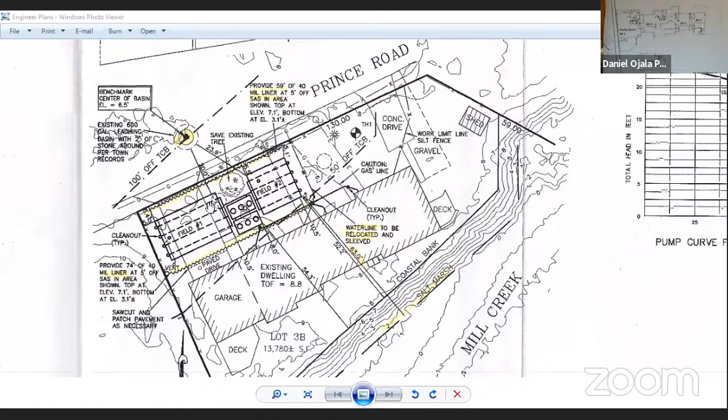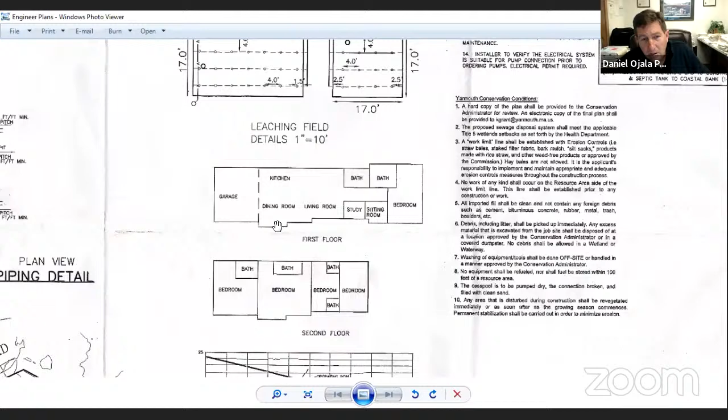The second print, I don't know if you can see that very well, but there is a pretty decent first and second floor plan that's now available. So I had emailed that directly to Bruce the other day, and we put it on the plan. The owner happens to be an architect and has got a pretty good hand, but that schematic there is pretty darn close. The bedroom over the garage is actually, you call it a studio. It's a 1-bedroom apartment or a studio apartment, but you refer to that as a bedroom.

And that's 100% legal if anyone's questioning it, because it actually withstood an appeal over 30 years ago. It was determined that it was there since the 50s or early 60s prior to zoning, and the neighbor appealed and lost. And there was actually a court case which affirmed the zoning board's decision that it was an apartment, it was legal, and it didn't need a special permit. And Peter Zorzi had actually gone through that almost 40 years ago. So it's clear that that is a legal apartment.

So we've got the dual compartment tank and the appurtenances. And about 33 years ago, he had a septic system design done by a team of Robin Wilcox and Ted Dumas. And they also determined that it was indeed 5 bedrooms. And now, in looking at Peter's plans, it's quite clear that it is 5 bedrooms.

There is a study and some sitting rooms, some little rooms, but there's another test in Title V that you can look at, which is you take the total number of rooms, and I could recite that verbatim if you'd like, but excluding bathrooms and hallways, living rooms, things like that. You count up all the rooms in the house and divide by 2 and round down. And so at 10 rooms, divided by 2 is 5, and you don't have to round down, but that also gives you the firm 5-bedroom existing.

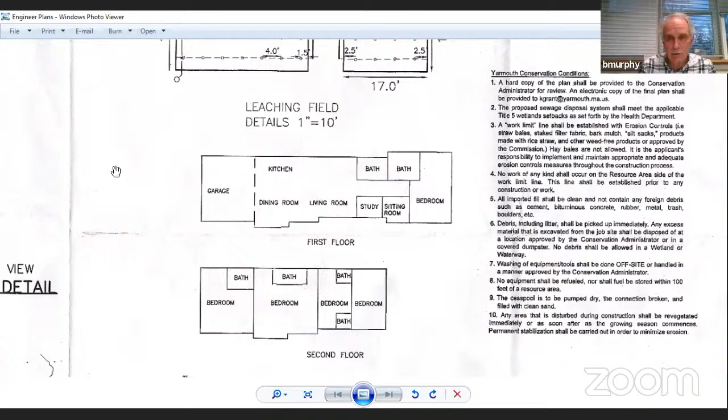I mean, we're getting 3 months. Fair enough. Yeah, that would probably be safer. I know you guys have a lot on the plate with the COVID and everything. Board members have any questions? Obviously, there's no room there. The only alternative is a tight tank, which we all know what it is and what that entails. That's, as I see it, the only other option. So not a lot here.

Yeah, tight tanks do better with a seasonal use. If you're there every day, they're very expensive. And then you get the honey wagon coming down the street, dripping. Oh, I agree, 100%. They're tough. So this is an all-season home? Yeah, it is. It's a year-round residence. Fully insulated, heated, everything.

So if you want to make a motion, we can move forward, if there's no other discussion. So perhaps we can move ahead with it then. I move that we recognize that this is maximum feasible compliance with Title V, the 4 variances as listed. Sorry, go ahead. And also the 2 variances under the town septic regulation.

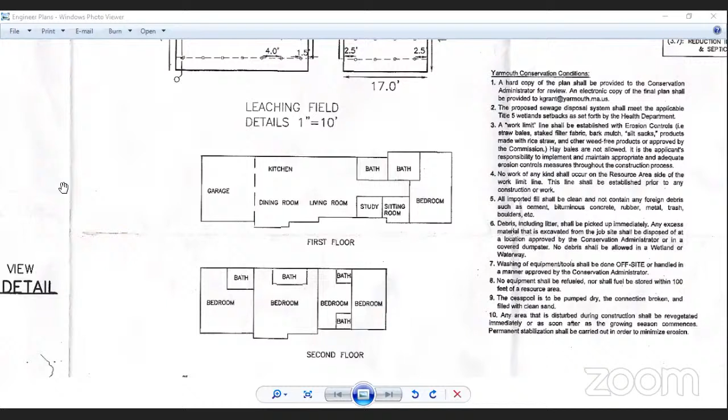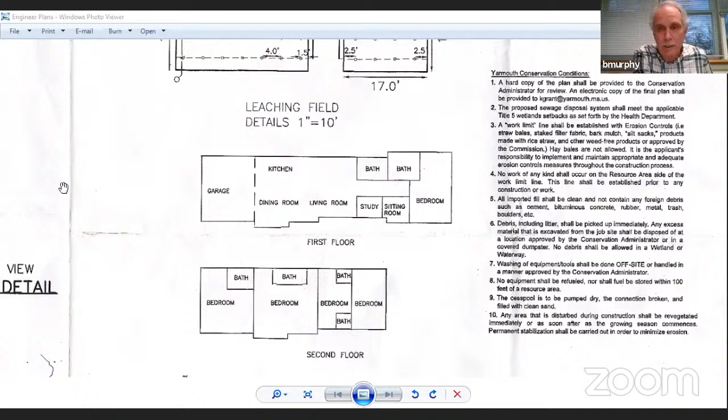Need a second to that motion. Second. Thank you, Deborah. Any further discussion before we vote? Charlie, anything? Because obviously we can't see you. Bruce? Nope, that's fine. Nothing from Charlie then? Charlie supports it. He was trying to make a motion earlier, but we couldn't get the voice to work. Okay, thank you. So all in favor, say aye and raise your hand so we can all see it. Aye. Aye. Aye. Okay, so it's unanimous. That passes.

Wonderful. Thank you very much for your time. I appreciate it very, very much. As usual, thanks for coming in. It was really very clearly stated. Thanks.

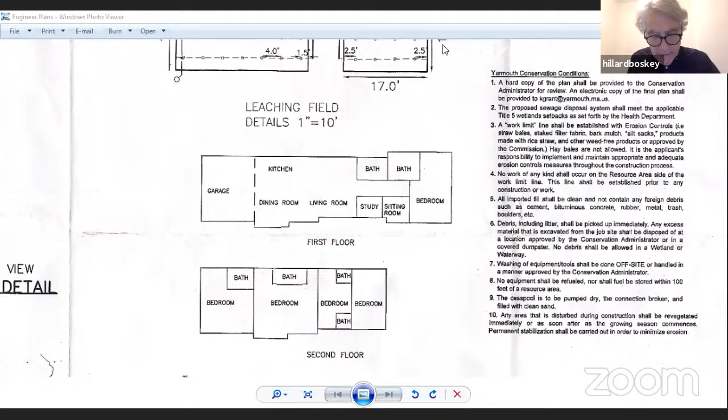Okay, the third item on the agenda is an update, as I said, on the coronavirus. Director Murphy, it's your stage. Okay, let's get the Zoom Master Meredith up on the process here.

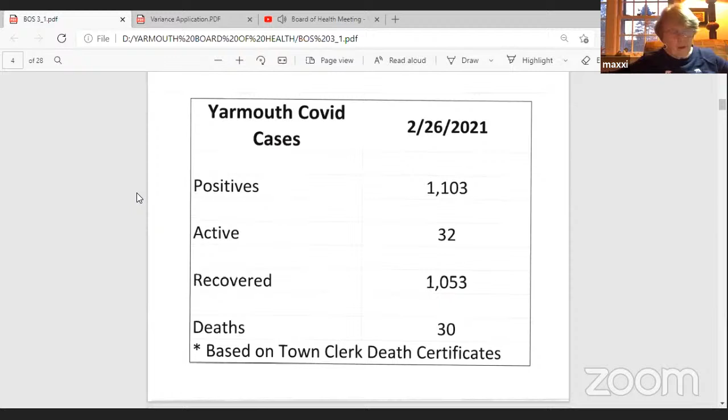So as of last Friday, overall, since last March, there were 1,103 cases. As of last Friday, we were down to 32 active cases within town. And recovered, which we're changing to released from isolation, 1,053 cases. And we're up to 30 deaths, and I think we had one death last week, so we went from 29 to 30. Bruce, I had a question: 4 of the deaths have been at Liberty. Is there anything going on there? No, not that we're aware of.

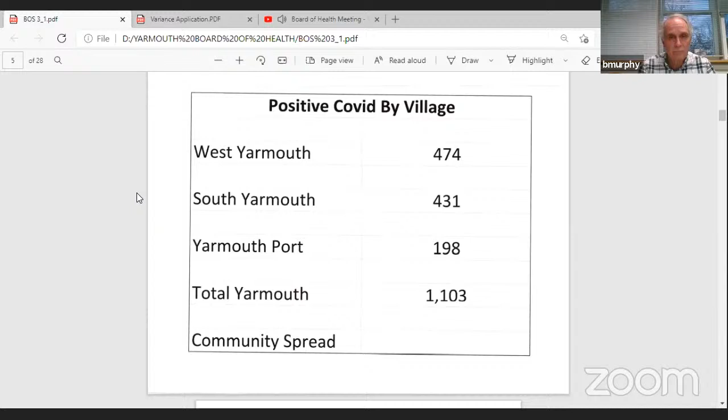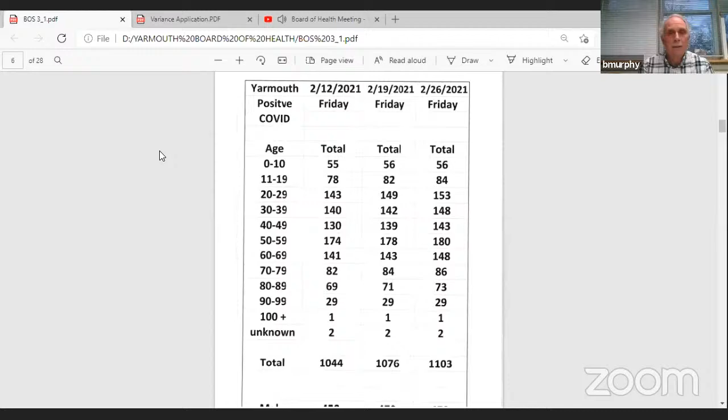We can still see its community spread between West Yarmouth and South Yarmouth. It's also based on population, the higher areas in town. So it's not in one particular place, a nursing home or a business. It's community spread, continuing. Our Friday totals show it's slowed down over the last several weeks, where before we were getting probably 15 cases a day. Now we're down to 4 to 5. So the totals have just gone up a little bit.

By age group, it's still higher between 50 to 59, but we only had 2 cases over a week. So that's slowed down in that area. It's all slowed down a little bit. And then age 20 through 29 went up 4 cases, and 30 to 39 went up 6 cases.

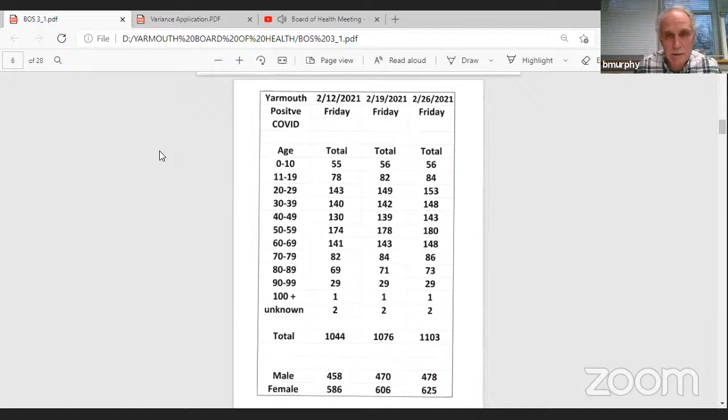You know, that's an area of our workforce, and that's the area of families that have children in the school that we still need to continue to take precautions with. As we go down, we can see how it's spread between male and female. Still, females getting more of the cases.

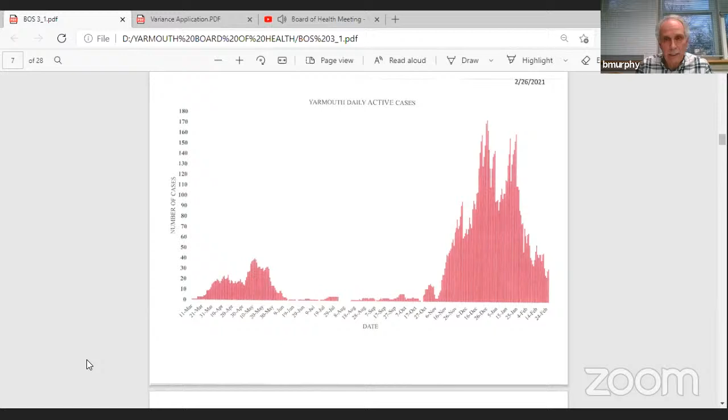Okay. These are the daily cases that we track, and as we can see, the number of daily cases that we had at any particular time in May was approximately 40. And then it went over the summer. And then, as we can see up in December, we had an active of almost 170, 180 cases one day. And as we can see, it's coming down now. And we'll be able to see that on our state chart coming up in a minute.

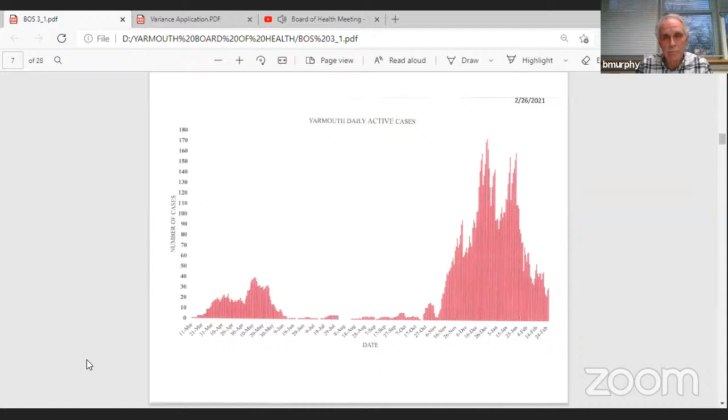Oh, wait. Right now we're down to about 32 active cases. So it's coming right down, staying right here. So what we say right now, we are on the backside of the surge. Okay.

The state view of all the Cape towns came out on Friday, and we can see Yarmouth at the bottom at 3.49% positivity. We're in the yellow for our fourth consecutive week, which is very good. Prior to that, we were in the red high-risk category for 8 consecutive weeks. But you can also see all the Cape towns are now out of the red high-risk categories, and only a few weeks ago there were 10 towns in the high risk. So you can see Cape-wide, it's decreasing.

Our numbers of total testing is also coming down, where we had tested about 3,000 people over the last 2 weeks. We're down to 2,000 now. And we believe some of that is because the nursing homes have all their residents tested, and a majority of the staff tested. And some of them are not on the state requirement of testing 3 days a week. So we're seeing less testing.

So we've been right about the 3.4. It says a little higher. I think we were at 3.3 the week before. So it's a good trend that we're moving, and we saw that from the earlier slide that we're on the backside. So we still have cases. People still need to be cautious, but overall, the whole Cape is on the right track.

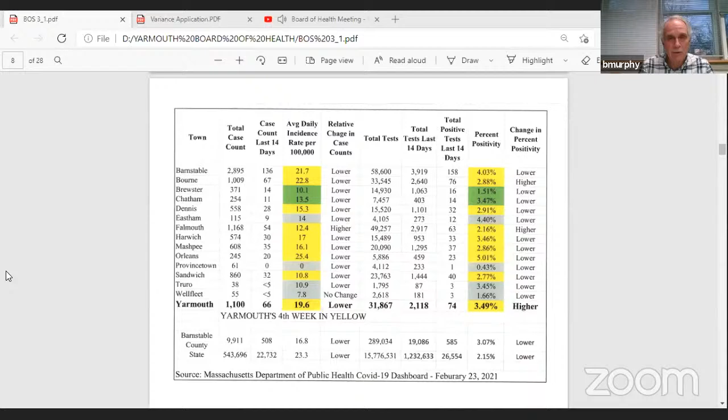Hospitalizations, I don't know if you can slide this over or move our pictures to the side. Or you can see it on this one, okay. It doesn't come up. Is the 25th the last day? Yep. So this is an update from the Cape Cod hospitals, both Cape Cod and Falmouth.

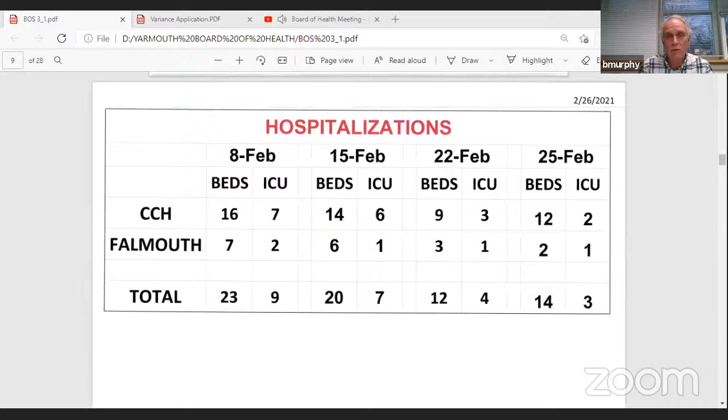We can see based on the 25th on the far right, in Cape Cod Hospital, there were 12 COVID people in beds, with 2 in ICU, and at Falmouth Hospital, 1. So that's kind of stayed up a little bit for the 22nd, but down from February 8th and February 15th, the first 2 weeks in February. So we've even seen, hopefully, less strain on both hospitals. Okay.

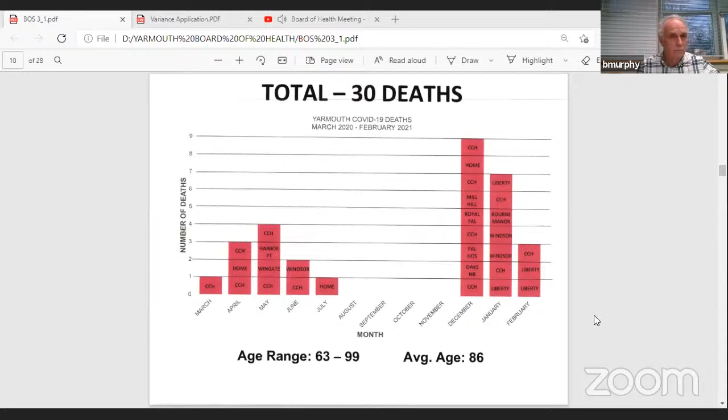Oh, you know what? This one. Okay, yes, the deaths that we saw, this went up to 30. We had 3 in February. Yes, we had a couple in the nursing homes, but the last one was at Cape Cod Hospital. So we don't have all the data on it, so we don't know if these people that have passed away at Cape Cod Hospital were in a nursing home first. So is that something we can get, Bruce?

I can look at digging into it. I mean, when the data comes to us, it just has the last place of where the person was. So I could see if it's in Maven. I'm not sure, but we could take a look at that. Okay.

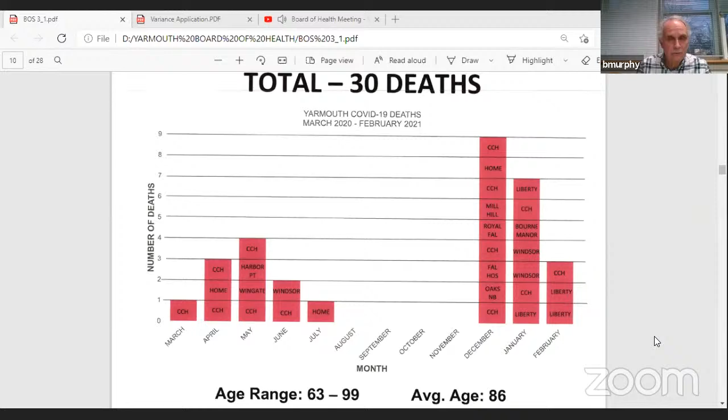I put this chart back in. I don't know if it was in your board's pack, but I put it back in. Precautions people need to take. And I can't stress enough to the public that's watching this, we put this in every week. It's on everything we talk about on Channel 18: avoid gatherings, dinner parties, birthday parties, sleepovers, play dates, carpooling unless it's a family member.

You need to wear a mask. If you don't feel well or are waiting for a test, stay home until the tests come. Do not go to school or work. Just this week, we had a birthday party where now we have a couple positives, which means the kids aren't going to school and the parents aren't going to work because the kids are too young to stay home by themselves. So people are still holding parties.

They're still having gatherings. I just can't stress it enough that we're still seeing positive cases. So to try to stop the spread, mask up, social distance, wash the hands. So we'll go from there.

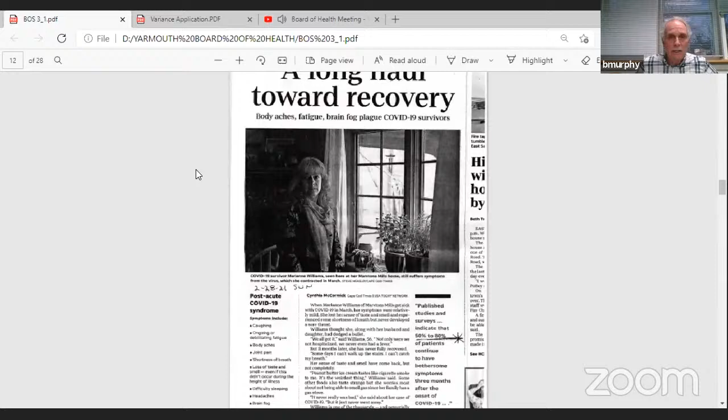Interesting enough, I think on Sunday's paper, one of the first page articles is the long haul towards recovery. What they're saying is once people have had COVID, maybe 50% or more are still having symptoms after they come off. These symptoms can range from body aches, shortness of breath, coughing, headaches.

So we're hearing a lot more of that, and that's why I changed that on the earlier slide from recovered to off isolation. From talking to people coming off COVID, there's still some symptoms that they're struggling with. And I thought this was an appropriate article. This was a lady from Marston's Mills, 56 years old. But we do have other cases of people even younger that are experiencing symptoms even after they've been cleared. Okay.

Interesting, at the bottom of this, still on page 1, was a bill to bring more COVID money, CARES Act money, to Cape Cod of 65 million. Out of that 65 million, 24 million is supposed to be going to Cape towns. So we'll be able to use that for either additional town signboards,

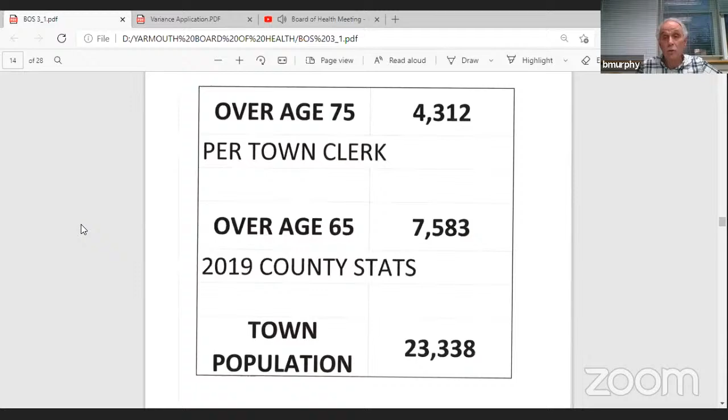Okay. So vaccination plans: what we're working on here in Yarmouth is we're still working with the county health department, whose difficulty is only receiving 975 total doses per week from the state. And right now, out of that 975, almost all of it is being used by people that need their second dosage. So that's the difficulty, that there's really not first dosage available.

There are 4 to 5 ongoing regional sites with the county that we've been working with. And again, they're going to be used for second doses. The good news is the one mass Cape vaccination site that the state said a week ago they would not have, they've rethought their position, and with a lot of calls and lobbying from our state senators, Senator Cyr and our representatives, have pushed the governor to include one large mass vaccination site at the community college.

That will put the smaller regional sites on hold for now. So that will be helpful, that we'll be able to get more vaccine and try to get more people vaccinated over the next couple of weeks. People can still try the local pharmacies here on Station Ave, South Yarmouth, CVS in East Falmouth, Walgreens in Hyannis, Stop and Shop, Hyannis and Harwich, but these are also filling up very quickly. Okay.

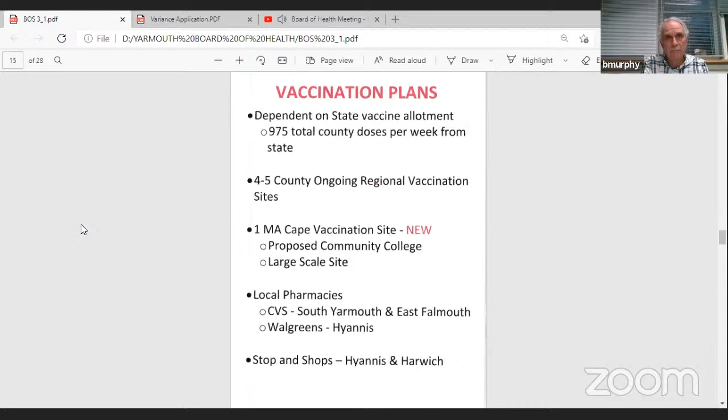So we see the mass vaccination site in the works. This was in Friday's paper. Julian Cyr said they're hoping to get the site up and going to do 4,000 doses. That would be this week. I'm not sure they're up to that, but that's the direction that they're trying to work towards. Okay.

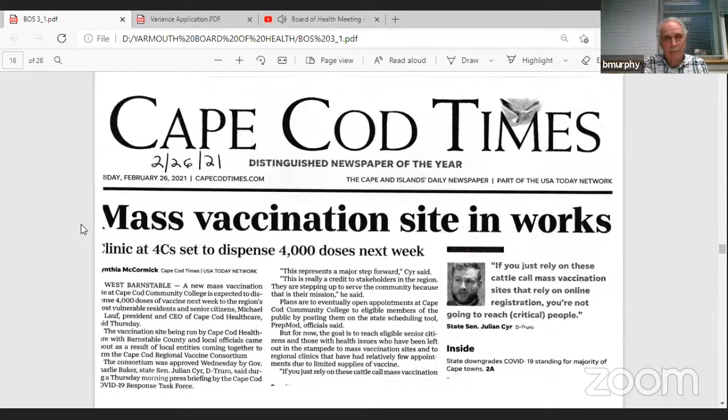Bruce? Okay. Bruce, I just want to mention also that the governor has changed his mind and is going to be sending vaccine to hospitals and healthcare systems again. So that's another resource that people might have and should take advantage of if they are contacted by someone from their healthcare system. That is correct.

We do hear that the governor just released some to hospitals. I know Cape Cod Hospital is going to get some. It isn't clear how they're going to get their vaccine out. I know the last time they called some of their patients, people that they knew were in need. And a lot of it is also going to go to people that need a second shot. So the hospital will be in the mix.

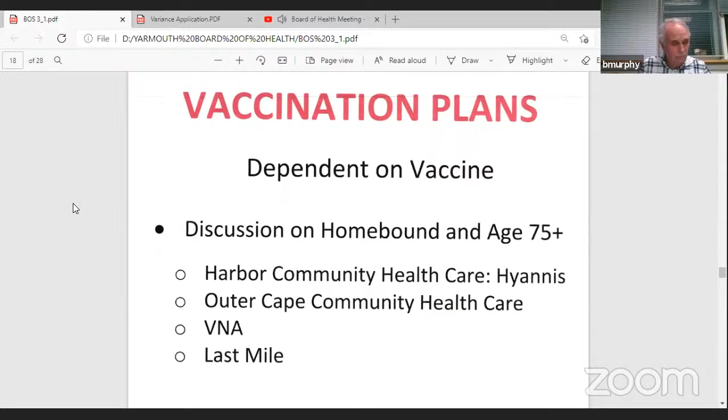Notifications, how do we get all these notifications? People want to know, how do we get it out to them? Our social media platforms, whether we get it out on Facebook, Channel 18, we'll get it out there. We do have the line that we'll be establishing up at the senior center. It's going to try to be manned by 4 people, just so they can talk to people and call them if we need it. The county has a helpline. There's the Code Red calls that I put out in the newspaper.

So as we go forward, there'll be plenty of opportunities for people to get a message. And it will be ongoing. So it's not like, oh, I just missed one clinic they had up at the community college. They're hoping to run the community college 5 days a week. So I think once the vaccine becomes more available, you'll see more appointments at a closer location.

Okay. So the state number that I mentioned earlier is the 211 number. They will assist in scheduling an appointment if you have difficulty. I know it takes some time from what I've heard to go through that, but that's the state number. Unfortunately, most of the numbers or locations they give you are off Cape at Gillette or Fenway. Dartmouth, the new Dartmouth site filled up very quickly.

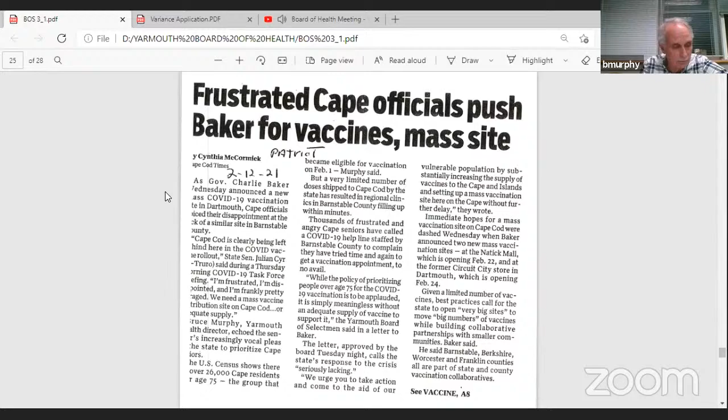So with that, before we get to the next one, stay right on the... No, go back to frustrated. Is there anybody who has any questions on the whole vaccine status right now? Good? Great. You're muted, Mr. Chairman.

Sorry about that. Yeah, maybe just give us a brief summary on changes that started today. There's some loosening of restrictions in restaurants and so on. Anything you can share with us? Yes, I didn't put any slides in on that, but today, from last Thursday, Friday, the governor did ease up some of the restrictions based on the percent of positivity decreasing.

Restaurants are no longer at 40 to 50%. They can open up to 100% as long as the tables are 6 feet apart, which they were over the summer. So that should work, and that helped the restaurants. They can use plexiglass in between to help keep the 6 foot spacing. So I think that's good news for the restaurant people. I think that's probably the biggest thing.